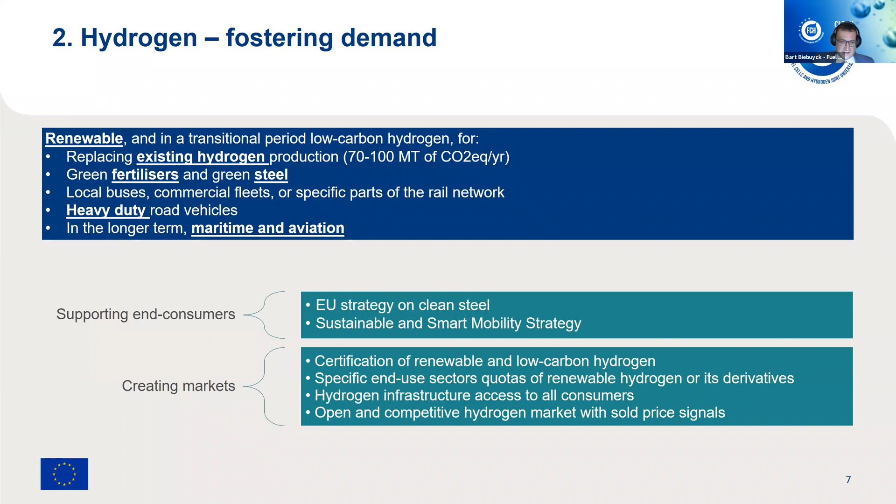In terms of supply and infrastructure, for the producers, we will mainly support them through a common low carbon threshold for hydrogen production facilities, and the certification, as I explained already. In Europe, we also have an emission trading scheme, so we will revise that one. We are thinking very seriously about a carbon contract for differences. We will have to make a market-based support scheme for renewable hydrogen, and also liquid markets with commodity-based hydrogen trading.

In terms of infrastructure, we have the Alternative Fuels Infrastructure Directive. This will be revised next year, and there we will try to make sure that hydrogen becomes mandatory for member states to put in hydrogen refueling stations. We will also have revised TEN-E, the Trans-European Network on Energy, and the internal gas markets legislation, which will be changed to include hydrogen, along with a revision of the 10-year infrastructure plan.

Bart, you're going in and out again. If you could just, your audio is going in and out a little bit. Is it better now again? Right now it's good, okay.

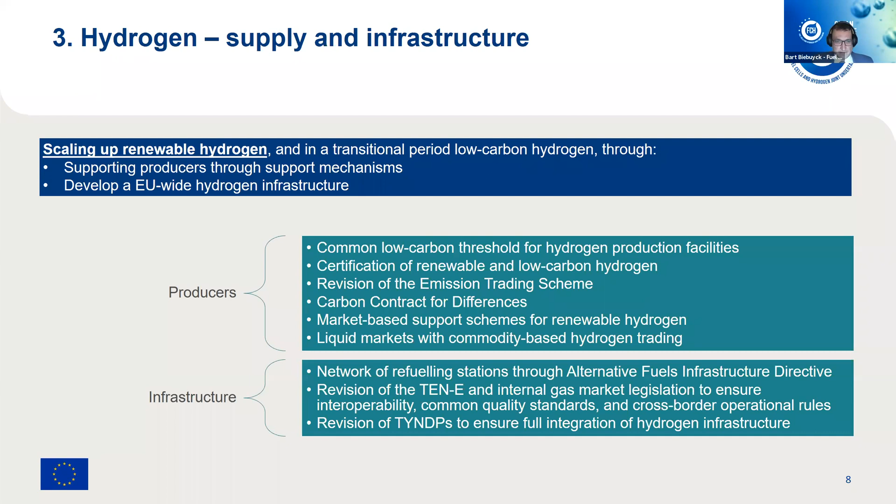So the next one is the research and innovation part. Europe has a certain global leadership role, and the idea is to keep and strengthen that role. This will be done through the establishment of a new joint undertaking called the Clean Hydrogen Partnership, which will be the successor of the FCH-JU. So from summer next year, we will change name. We will have other research and innovation projects in other parts of the Horizon Europe funding area, the Innovation Fund, and regional investment instruments, all to support R&I.

In R&I, we will work on four main pillars. The first is hydrogen generation, but also at large size, so more efficient and more cost-effective electrolyzers. We'll also look into new, low TRL ways of producing hydrogen, things like algae or direct sunlight splitting and so on. Then we will also work on large-scale end-use applications for industry and heavy-duty transport, and we will do pre-normative research as well.

The third pillar is infrastructure, so we will do research on, for example, how to refurbish current natural gas pipelines to be used in future with 100% hydrogen or blended hydrogen. The last pillar is cross-cutting, where we support the policy through standardization, but also look into the total value chain, life cycle, critical raw materials, and so on.

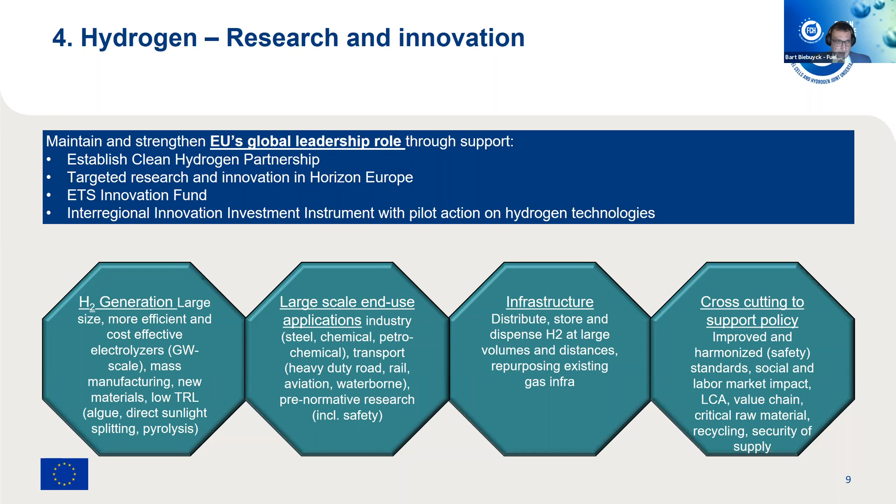Fifth is the international dimension. Europe will make sure that in bilateral or regional cooperation, hydrogen is put on the table. We have several instruments for that: the Neighborhood Investment Platform, which works with countries around the EU 27, and association agreements for research where we will work with them. We will also look into hydrogen collaboration in the Africa-Europe Green Initiative, because we believe that we can—

Excuse me, Bart, it's happening again. Excuse me, Bart, sorry to interrupt. It was happening again, the garbling.

Okay, sorry for that. So in terms of Africa, Europe believes that we can import a lot of green hydrogen from Africa through pipelines to Europe. And as I said, we will make sure that hydrogen is on the table in every discussion, in any diplomacy or international event that exists.

In terms of international markets, we have to make sure that we have common greenhouse gas emission reduction standards and criteria. We need to make sure that green hydrogen in Europe is calculated the same way as in Australia or the US or wherever. We want Europe to be the benchmark for hydrogen transactions and to facilitate the emergence of a rule-based hydrogen market. We will participate in multilateral fora.

We have the IPHE, Mission Innovation, the Hydrogen Energy Ministerial meeting, and also the Clean Energy Ministerial, which now has a hydrogen initiative. In all these multilateral fora, Europe is really leading or co-leading them, again to put hydrogen at the highest level of the agenda.

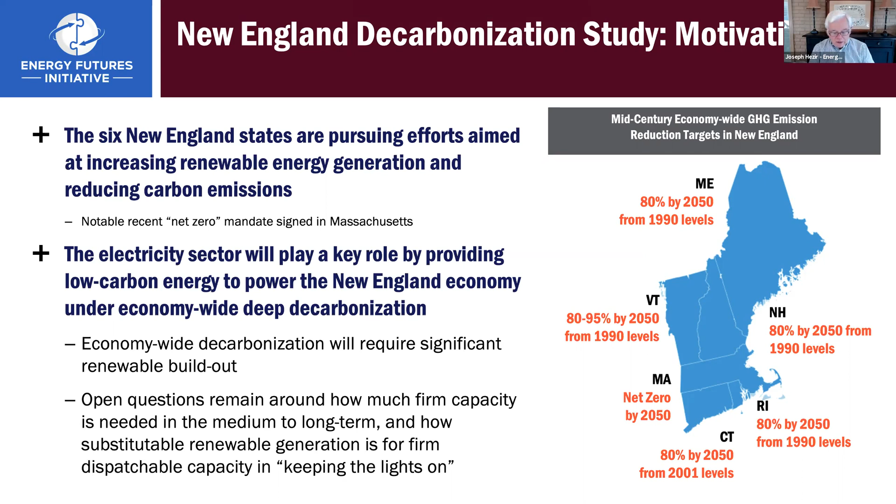In our modeling work, we have developed 2 scenarios that we've been looking at: one is a high electrification scenario and one is a high fuel scenario. As some of our modeling work has shown, the results show very little difference between the 2 scenarios. Basically, the work we're doing shows that in terms of decarbonization, we can get to about 85% through emissions reductions. And then if one were to try and move beyond that to a goal of net zero, you would have to do that through various carbon removal strategies or carbon offsets.

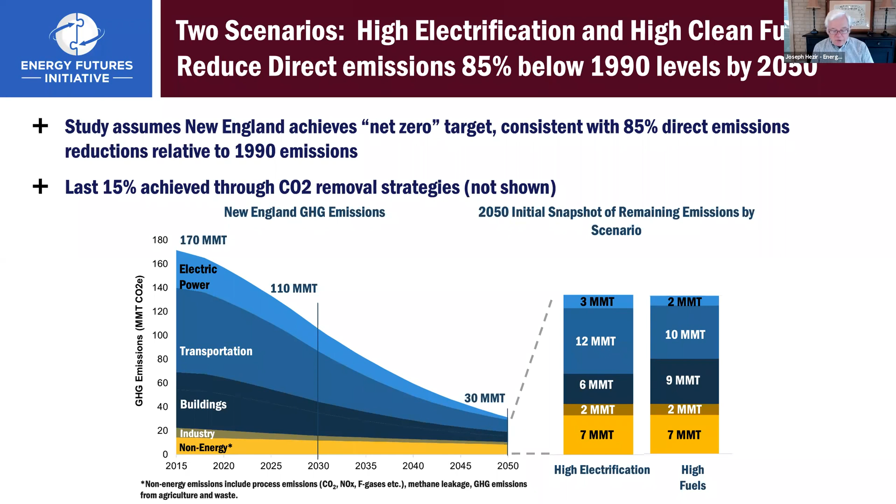One of the key aspects of both of these modeling scenarios is the fact that whether it's high electrification or high fuels, the demand for electricity is going to increase substantially. In the high electrification scenario, it's almost a doubling. And in the case of the high fuel scenario, it's an increase of about 66%. So the electricity sector has a 2-part challenge: one is to decarbonize its generation while at the same time meeting a significant increase in demand.

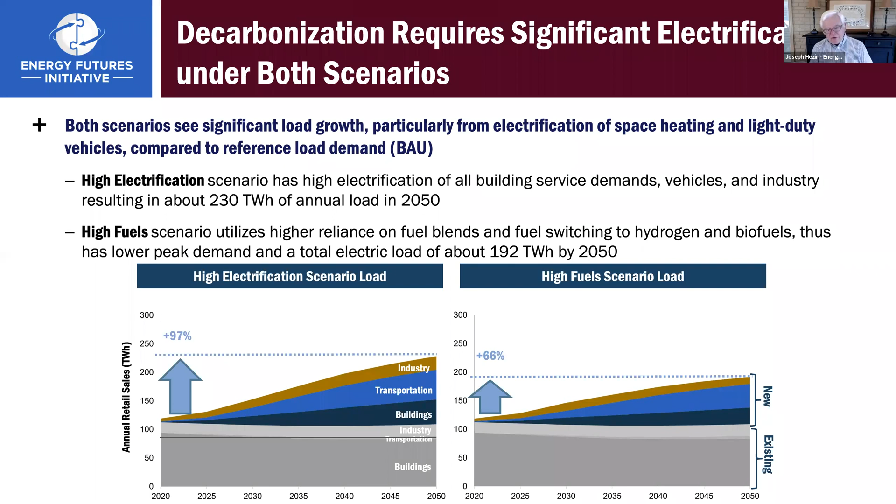The other aspect of our modeling work has shown that the increase in electricity load begins to change the seasonal pattern of electricity use in New England. New England would shift from a summer peaking electricity market to one that is winter peaking in the 2030s, literally within the next decade. Obviously the main driver of that is the penetration of electrification in residential and commercial heating.

The other aspect of it, if you look at the bar chart on the right, is that under both of the two scenarios we are looking at, the peak load in the winter increases to anywhere between 42 to 51 gigawatts, which is roughly a doubling of what the current winter peak is in New England. So there's going to be significantly increased demand for clean electricity. How is that demand going to be met?

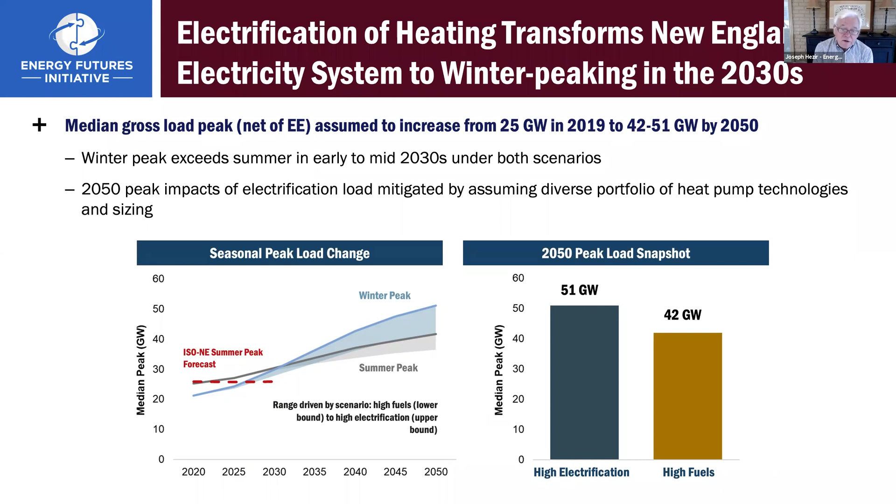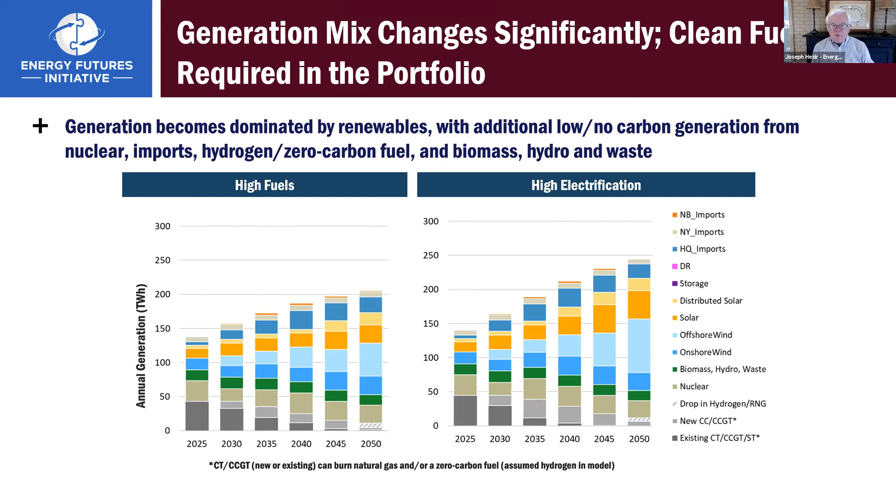And so if that fuel can be substituted with a clean fuel, it can help very much in adding to the opportunity to decarbonize the sector, but also to further stabilize and improve the reliability of the grid by having an opportunity for even greater dispatch to meet load requirements.

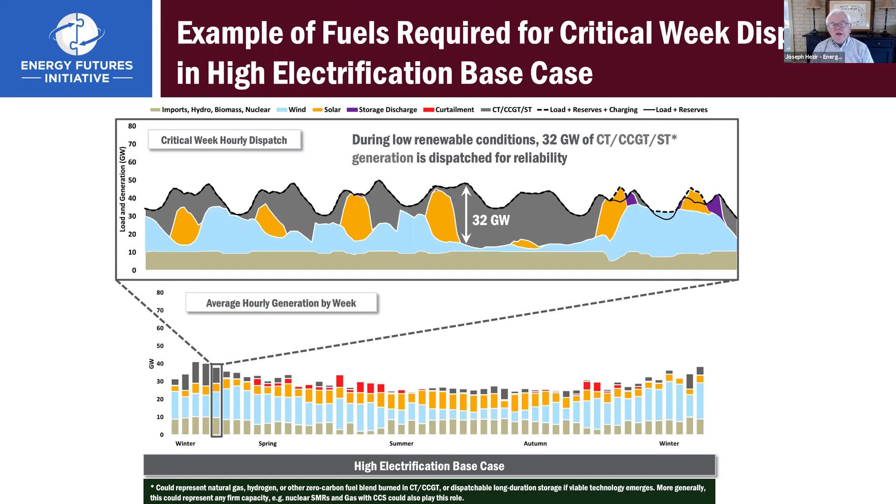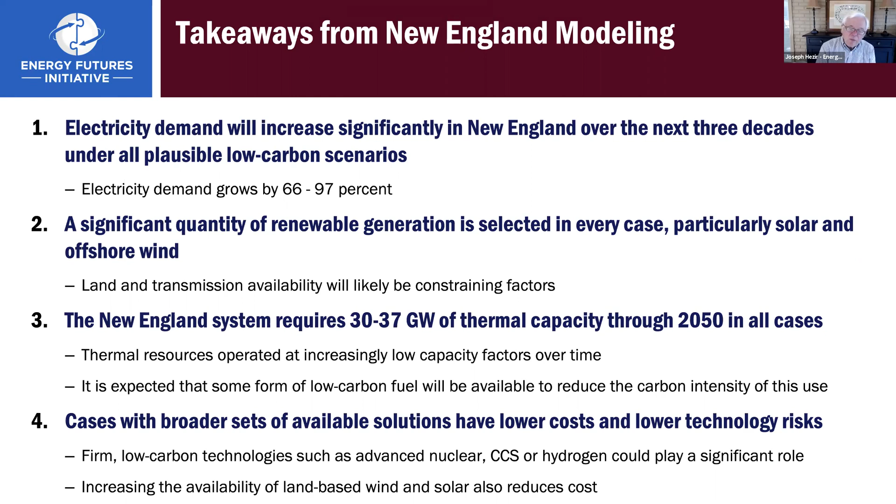And that's really where we think that hydrogen can play an increasing role that we've really yet to fully explore. And so with that, let me transition briefly into some other points I wanted to make with respect to hydrogen and how it could play a role in the region's clean energy economy.

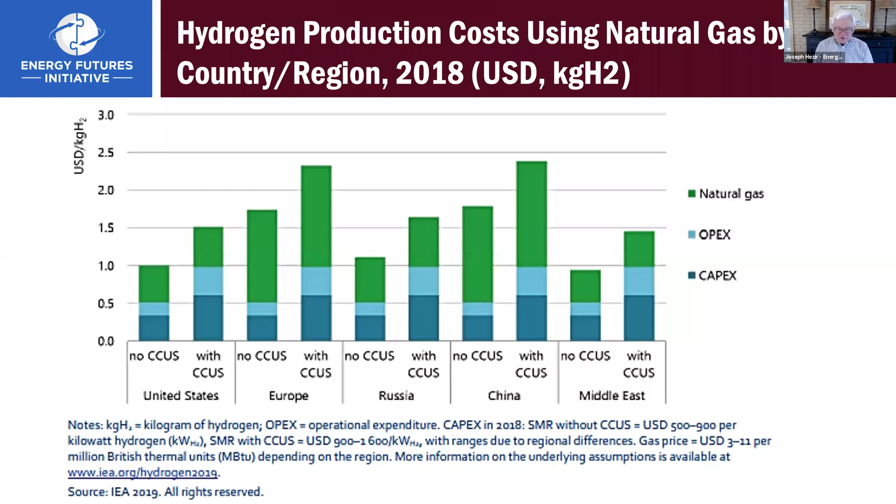But there's a big but here, and you'll see it on the next slide. The big but is that if you produce hydrogen from natural gas with CCUS, you need an option in order to sequester the carbon that's captured.

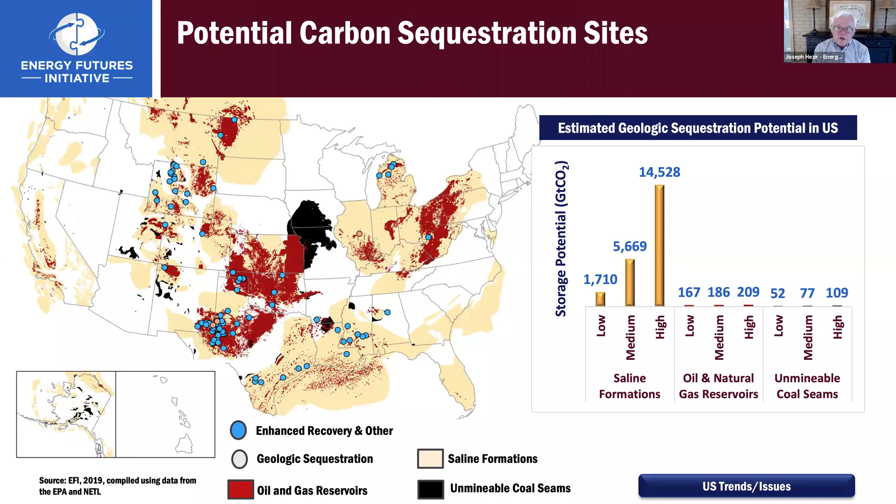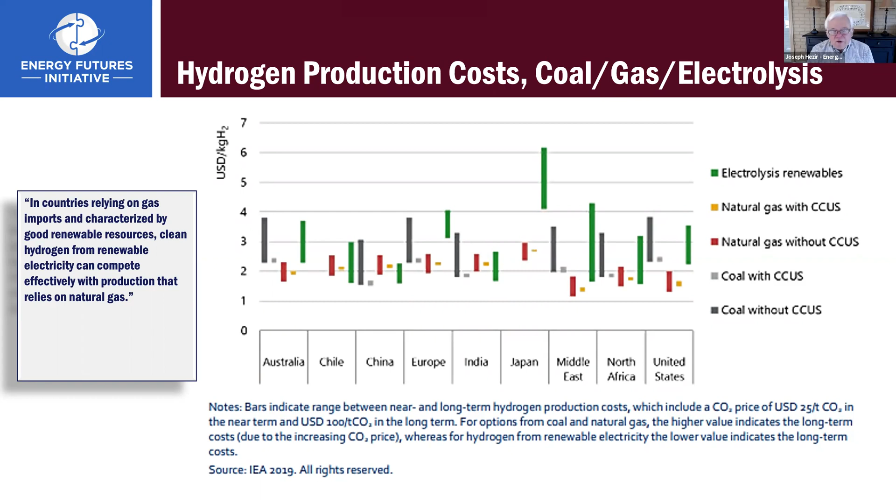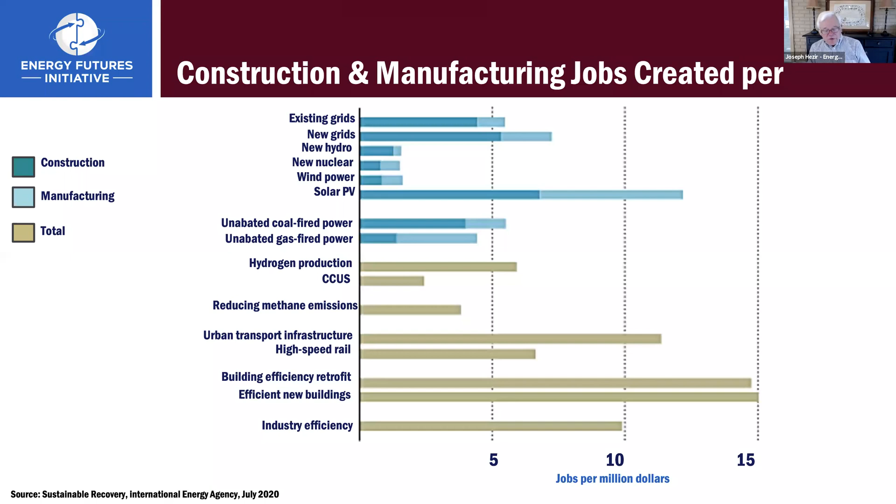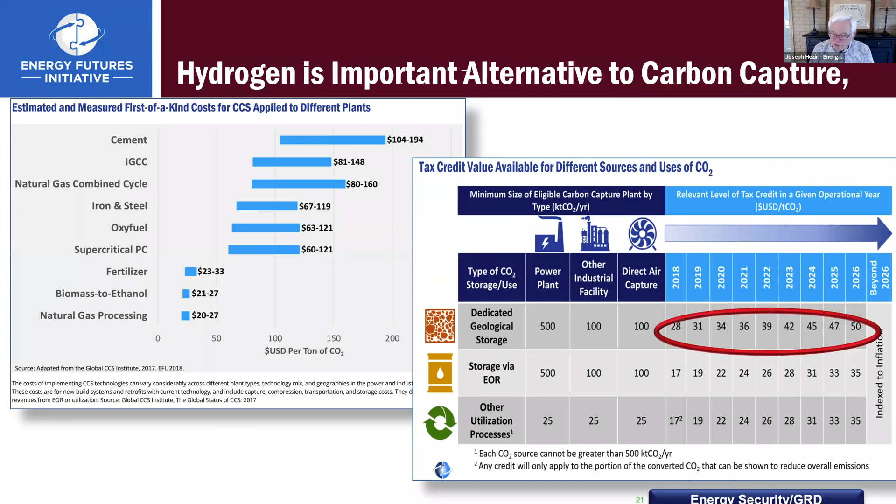Next slide, please. The point I want to make about industry: hydrogen is often talked about as a potential alternative, as a clean source of fuel for high temperature process heat for industries that otherwise would have challenges in decarbonization. This is some work EFI did several years ago, where on the right-hand side you see the benefit of the tax credit for carbon capture and utilization, which would be the primary alternative to clean hydrogen for use in process industries.

But as you can see, that CCUS with the tax credit is only competitive in a few industries, particularly ethanol, fertilizer, and gas processing, and still not very competitive in some of the very carbon-intensive industries like cement and iron and steel. This, I think, further underscores the need to look very seriously at hydrogen as an alternative for those industries.

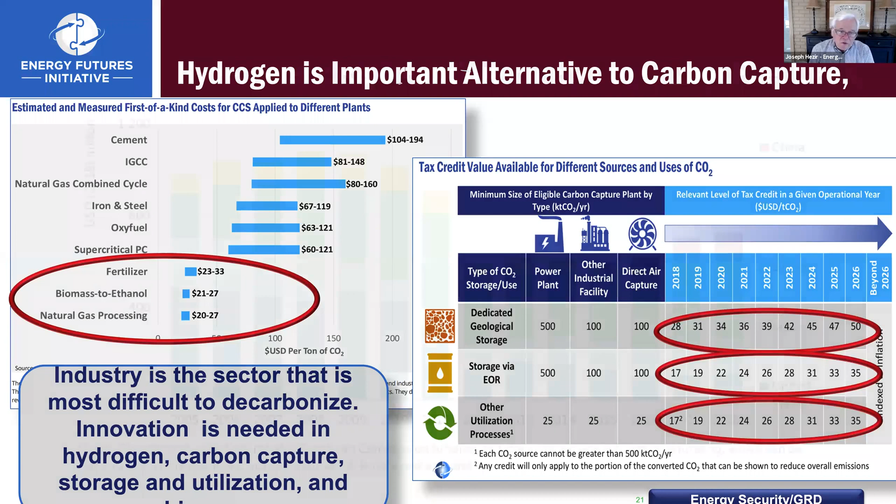And then the last slide I want to show here in terms of this overview of hydrogen is the current investment levels in innovation. If you go back 15 years ago, the US was the largest investor in hydrogen R&D, comprising about half of the global investment. Looking at what's happened over the last 15 years, we've dropped from half to less than 20% of the global hydrogen innovation budget, and our total spending has probably dropped now down to less than 100 million from well over 400 million.

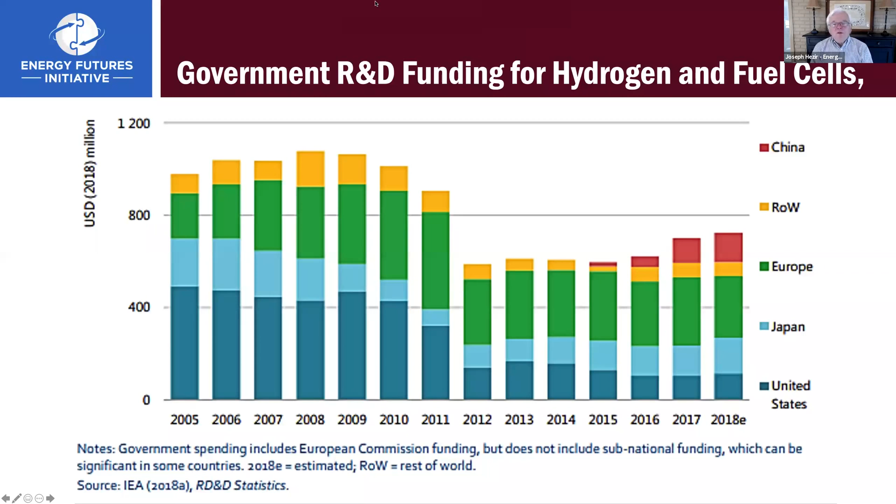So just to wrap this up here, I'd like to flip to the next slide, please. One idea that we've been working on at EFI is the notion of a hydrogen hub, which is a way to deploy the hydrogen economy.

This is an example of a Southern California West Coast hydrogen hub, where two steam methane reforming plants and an electrolyzer plant can supply the hydrogen needed for petroleum refining, port facilities, and some power generation, with nearby sequestration of CCUS.

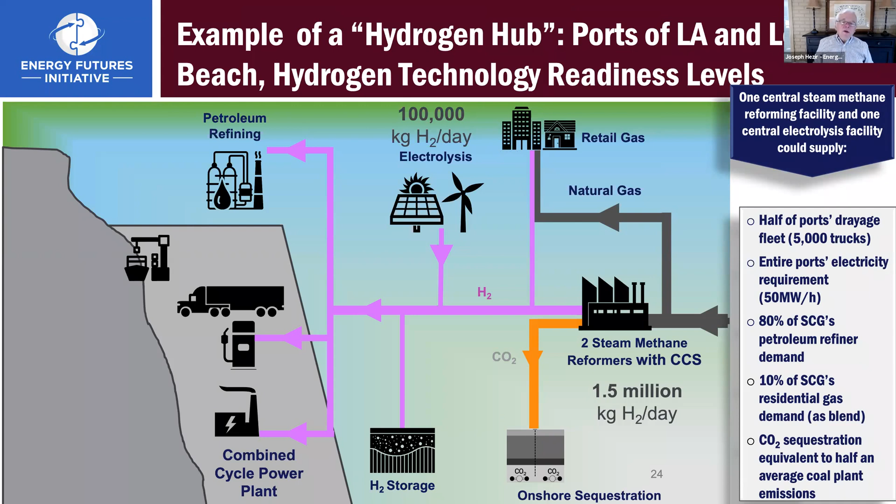And I know I'm running out of time, so I'd like to flip to the very last slide, if I could, please, and just summarize for you what I think are some of the issues to think about in terms of policy development and market development.

Obviously, any form of economy-wide decarbonization policy would set market expectations and encourage deployment. On the supply side, I think we need to invest in continued innovation to reduce costs, to find new ways to manage the carbon, and also to ensure that we have compatible infrastructure in pipelines and turbines.

But we really see the need here for market development through ways to create market pull incentives, whether they are for vehicle standards, blending standards, market design and electricity peaking requirements, or procurement standards. And last but not least, we need business model innovation to think about ways to produce hydrogen, not only for fuels, but for electricity and also for products.

And we think that the partnership idea to develop hydrogen hubs is the way to bring all of this together. And so with that, I'll end here and turn the presentation back to Peter.

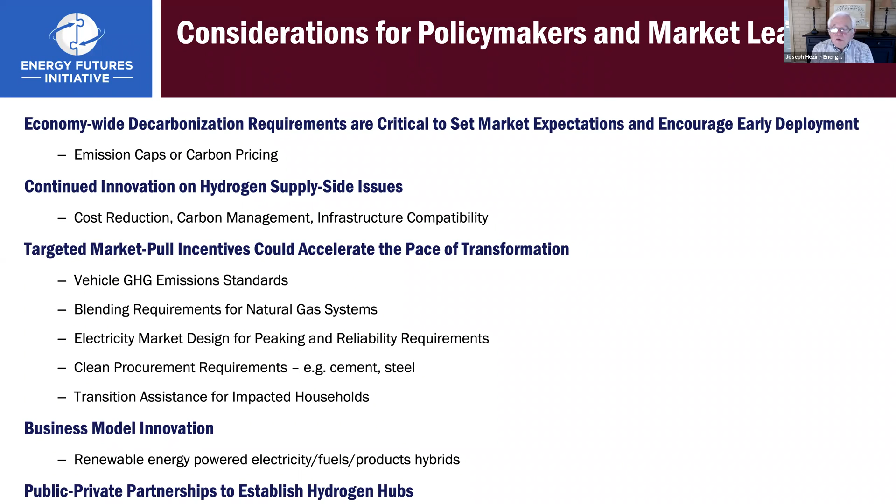Thank you, Joe. Thank you very much. That was very insightful and very helpful to go through that.